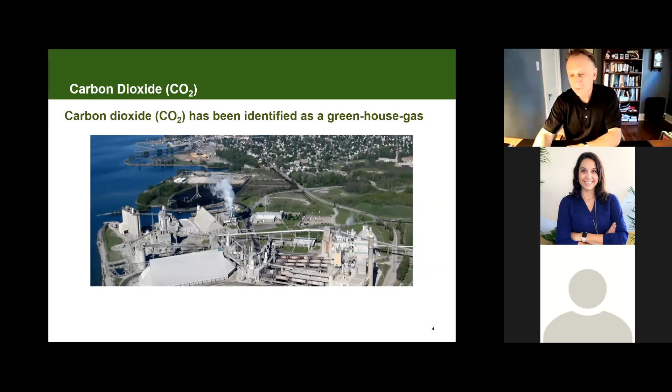Just to kind of bring it home, I know I try to keep this as a very generic presentation, but since this is Michigan, I can tell you that we have a plant in Alpena, for example, which makes about 2 million tons of clinker. And so in Alpena, we certainly don't want to make 2 million tons of CO2. So that kind of gives you an idea of what we're talking about.

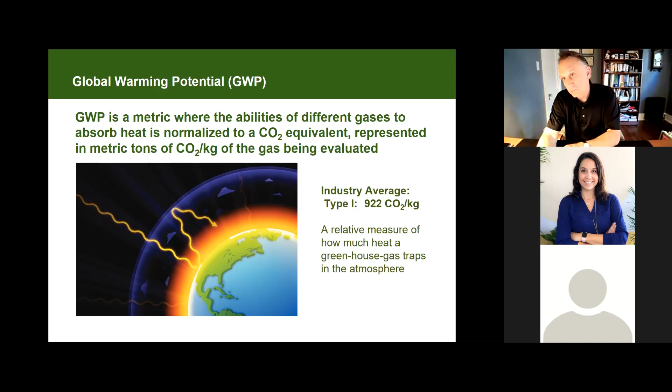So what does that mean? Is that good? Is that bad? It's just a value, is what it really is. It's just the value of the industry average for type 1. But the idea would be, how can we lower that number? So everything that a cement company is going to be interested in is, what can we do to improve our global warming potential? And that's a lot of what we're really aiming at doing, quite frankly.

Okay, so I mentioned a little bit earlier, I tried to set the stage about CO2, and now I've mentioned the idea that we want to lower our GWP. So what's going on at a cement plant? I talked about clinker and everything, but I was kind of quick and vague. So what are we really doing at a cement plant?

Well, during the manufacture of cement, limestone and selected raw materials are crushed, milled and proportioned in a manner that the resulting mixture contains the desired chemical composition that we're looking for in the finished cement. And all this material is then fed into a kiln, and the kiln is fueled by fossil fuels, which are heated to approximately 3,000 degrees Fahrenheit.

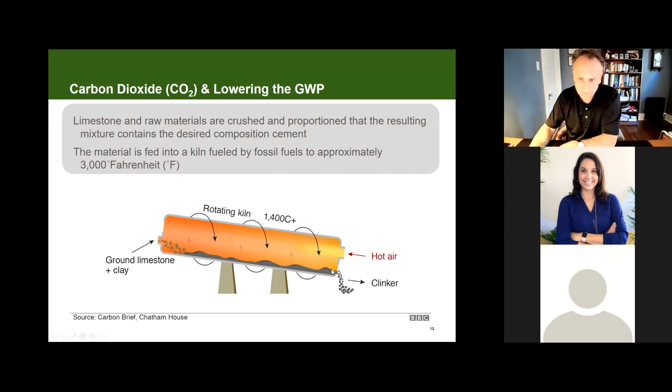So we introduce ground limestone and clay at one end of the kiln. At the other end of the kiln, we have our flame going. And then out of the kiln comes that clinker, which is what we're eventually going to grind into our cement. So then the problem, for lack of a better word, is what comes out of this kiln is our CO2.

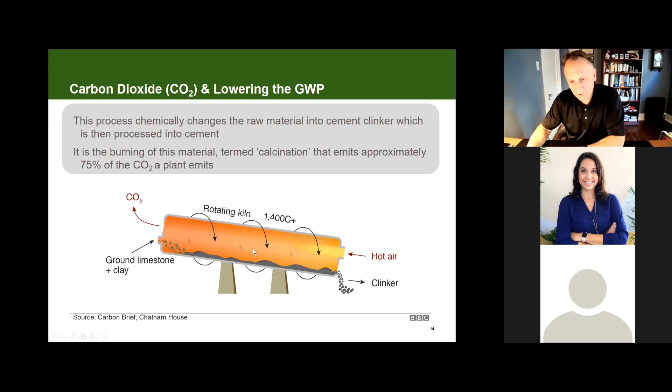So you can see here the burning of this material is termed calcination, and that emits approximately 75% of the CO2 that a plant emits. So this is the crux of what we're talking about: creating this hot air to burn up the limestone to create the clinker that creates our CO2.

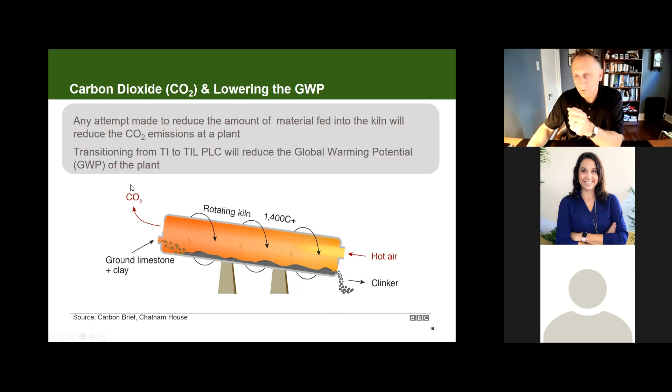So the idea would be, any attempt made to reduce the amount of material fed into the kiln will reduce your CO2 emissions at a plant. So what I'm getting at is, we ultimately want to produce this clinker, this product right here. However, if we can put less material through this kiln, we're going to produce less CO2. So here's our 1 ton of Portland cement clinker.

Let's say we take 5% of the cement clinker out and only made 95% clinker, and then put 5% ground limestone into that 1 ton. So let's say we marketed to the concrete producer a product that is still 1 ton of cement, but it's 95% clinker, 5% ground limestone, and he makes his concrete. What did we just do? Well, we've saved 5% of the CO2 at that plant.

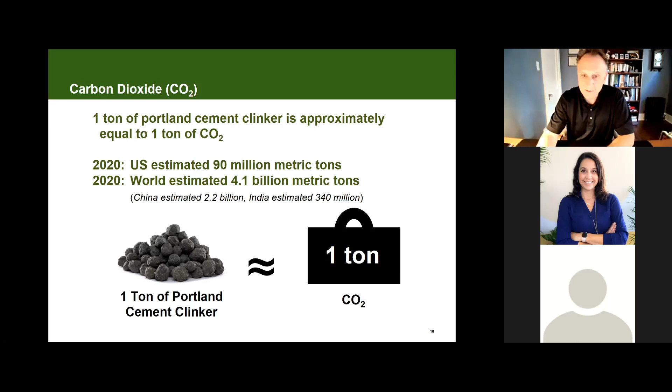So in Alpena, for example, if we were making 2 million tons of clinker, you just reduced your CO2 output by 5%. Now it's a small number, but that's exactly what we've been doing for probably about 10 years, maybe a dozen years now. So what does this mean with respect to cement specifications?

It means that ASTM C150, for 10 plus years or so, has allowed 5% of ground limestone to be introduced into that 1 ton of clinker. So you can see right here, limestone, the amount shall not be more than 5%. So by doing that, we've been able to reduce the CO2 output at our plants by 5%. You make 2 million tons, you've been able to decrease your CO2 output by 5%.

Okay, now the problem is, we have these articles. Literally 2 days ago: CO2 level just passes an important benchmark, a measure of humanity's war on nature. That was a headline, right? So cement companies realize we need to decrease our CO2 output even more. We need to improve our global warming potential even more.

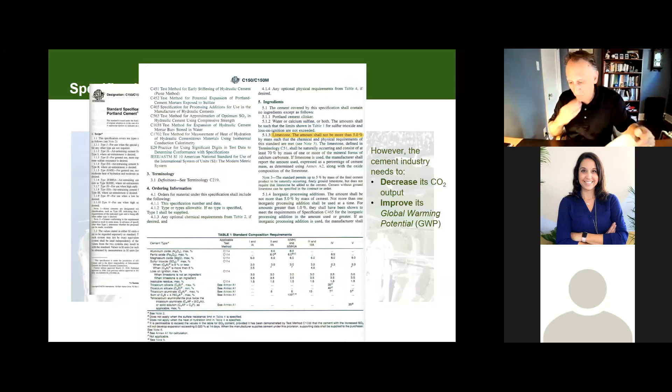So if you take two things from this presentation this morning: the cement industry needs to decrease its CO2 output and improve its global warming potential. That is what we're looking to do, right? So, for lack of a better word, we have to abandon ASTM C150. Anyone who's on this call, when you were in school learning about concrete, you designed with ASTM C150. Your professors taught you with ASTM C150.

If you started working, maybe designing with concrete, C150 is what you referenced. The person who mentored you used C150. Everyone, this was the document we used. Well, since it says 5%, we need to abandon that.

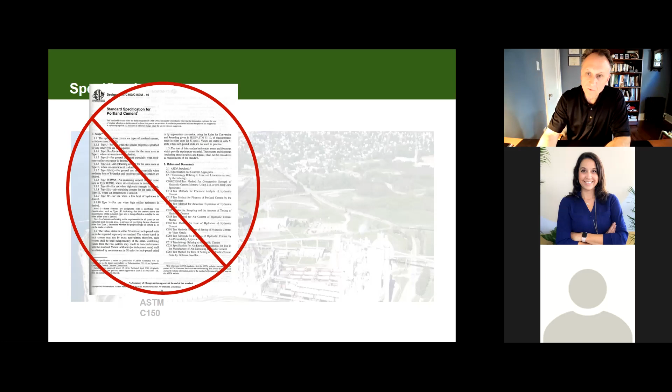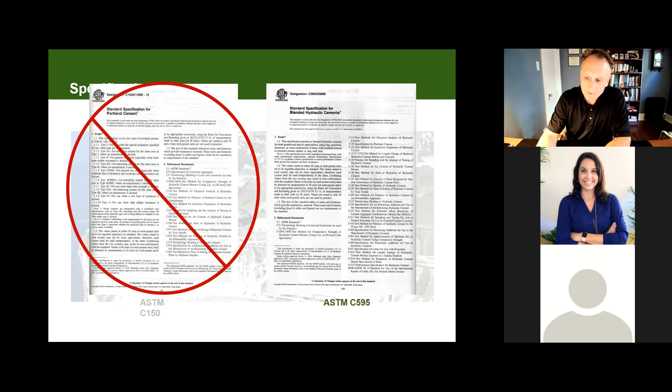And we need to go to what's called ASTM C595. And that's the standard specification for blended hydraulic cements. Now, why on earth would we use C595? Well, because that document, and boy, I'm clicking, it's awfully slow. That document says to make Portland limestone cement, so Portland limestone cement shall be a hydraulic cement in which the limestone content is more than 5%, but less than or equal to 15% by mass of the blended cement.

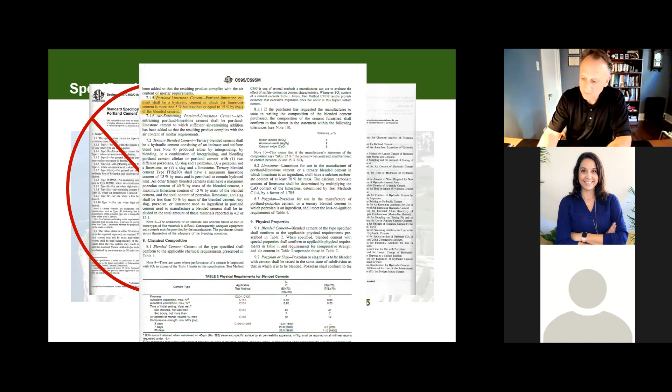So what C595 does, it allows you to go and use more limestone in that 1 ton of cement that you're going to market to the concrete producer. So like I said, for many years, we had 5% limestone. We want to reduce our CO2 output even more. So now we want to increase it past 5%. Well, guess what? We have to use this document, ASTM C595. So I hope that makes it clear why we're transitioning to C595.

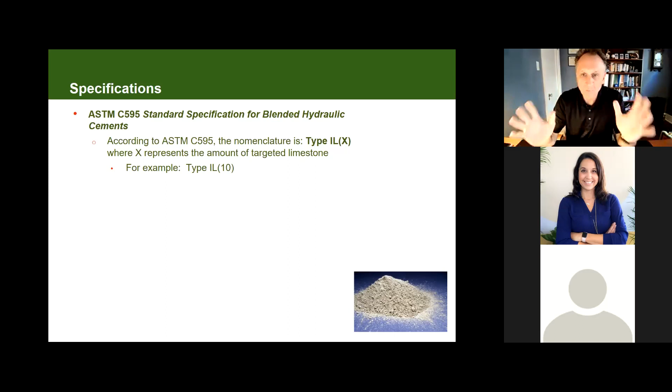So when you look at C595, you're going to see some nomenclature changes, right? So forever we've been using a type 1 Portland cement, if you will. Well, according to ASTM C595, the nomenclature is now going to be type 1L, and then some parentheses, and you're going to have a value in there. Right now, I've got X there, where the X represents the amount of the targeted limestone. For example, a type 1L10. So this would be a type 1 limestone cement that has no more than 10% ground limestone in that 1 ton of Portland cement. Okay, makes sense?

There's another document. It's called ASTM C1157. It's the standard spec for hydraulic cement. Now, in this document, there are no restrictions on the limestone addition. And so there it's just called a type GU for general use. And I'm just making you aware of this because you may see this spec as well. But this one, again, has no limit. It just says you can use in references as a GU.

Now, if you look at C595, you're going to see some other cements in there. For example, you'll see a type 1S30. What is that? Well, that'd be a type 1 that has 30% slag cement blended into that 1 ton of cement. There's a type 1P5. What's that? Well, that would be a type 1 that has up to 5%. It might be like silica fume blended into that 1 ton of cement. And then you can blend several cementitious materials. You can have a 1T S30P5, and that would be 30% slag and maybe 5% silica fume, all blended into that 1 ton of cement.

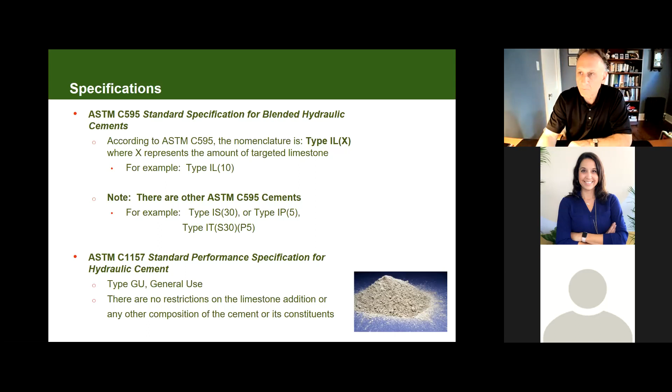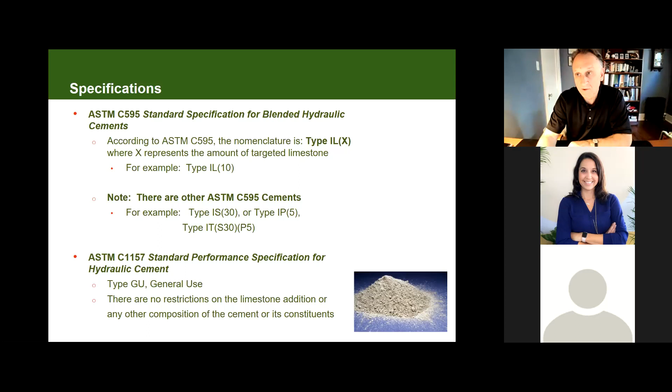So the point is, these look kind of different, right? I mean, we're used to a type 1 and a type 3 or something like that. We need to kind of put our mind around some of this different nomenclature, and I can tell you, we've been building with these cements actually for many years, even here in Michigan, right? So again, why would a cement plant transition to ASTM C595? To lower the plant's global warming potential. We definitely got to have that down pat.

And so transitioning from 5% limestone, which we've done for many years to make type 1, to less than 15% limestone to make a type 1L PLC, a plant will reduce its global warming potential. And I repeat that because, like I said, this is the thought process, if you will, to hopefully get us out of the crosshairs and get us out of these headlines that I read earlier. Okay.

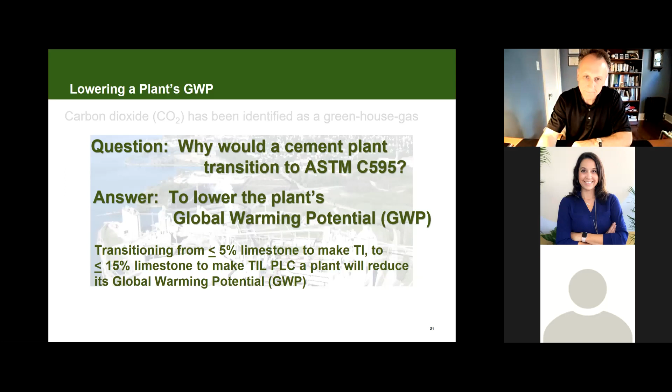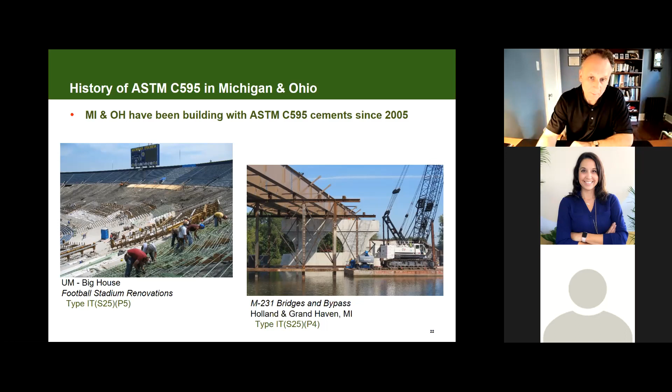So my point is, the industry has been changing, and our specifications, we'll talk about that in a little bit, our designers need to recognize this and get their specifications up to speed, and again, we really need to do this, and hopefully the first few slides kind of set the stage on why we need to be doing this.

Okay, what about codes and standards and guides and things like that? One thing that you'll find is all of your cement specifications and codes recognize ASTM C595. Whether it's the building code, the AIA master spec, whatever document you want to pull up, you're most likely going to find that the cement industry did its homework and were properly cited along next to C150. So C595, as far as codes and so forth, is considered as equal to C150.

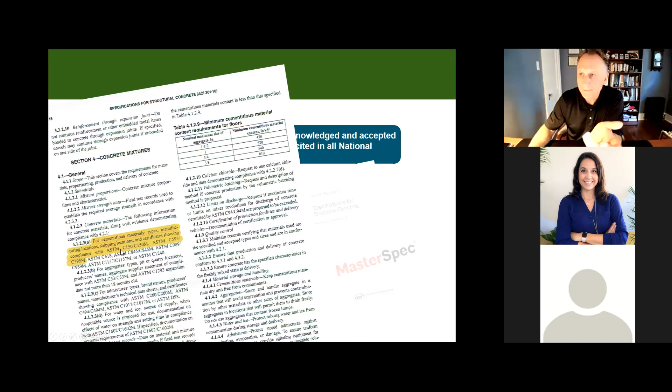By the way, when you see ASTM and you see the letter M here, that just stands for metric. So that means you can buy the document with English units or metric units, and that's kind of the idea there. But the point is, it's as simple as a comma and including C595. So you'll see that in all the documents.

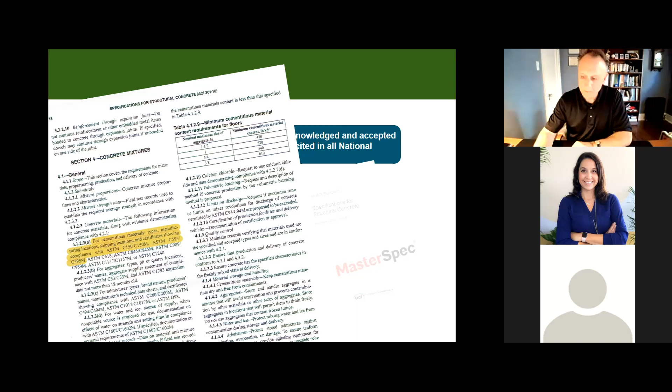So the question then would become, why would these codes and specifications allow a Portland limestone cement? Quite frankly, you may say, it sounds to me like you're putting sawdust in the hot dog, right? I told you a few minutes ago that instead of marketing 1 ton of Portland cement clinker, we're now going to take up to 15% clinker out and put in up to 15% ground limestone. So you may say, how can this possibly work? My strengths are going to be lower. This is going to be just horrible, because you're putting sawdust in the hot dog, if you allow me to use that analogy.

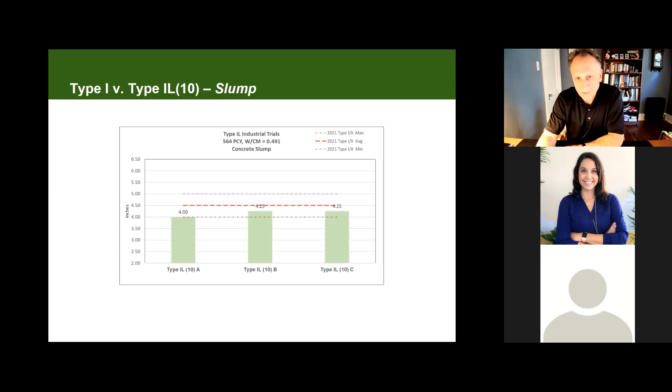So this is some testing from product from, again, July, August, September. So we ran some in, we slumped, for example. We hold all of our water at a constant 0.49 water cement ratio, which is something that we do. And we then evaluate how does it slump compared to what we made in 2021. And you can kind of see there, we were like, well, maybe we were at the low end, and we said, well, you need to make some improvements. Let's see if you can improve on slump, things like that. So that gives you an idea of where we were headed there.

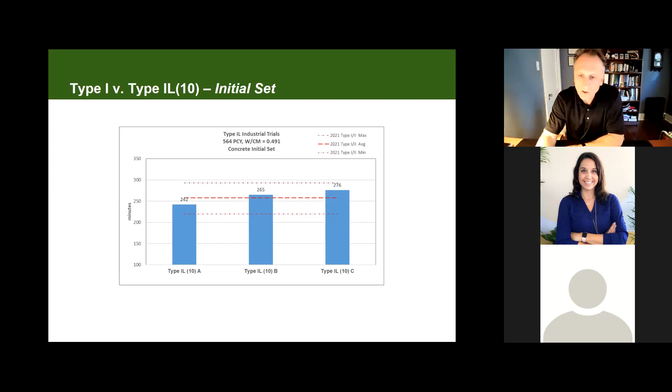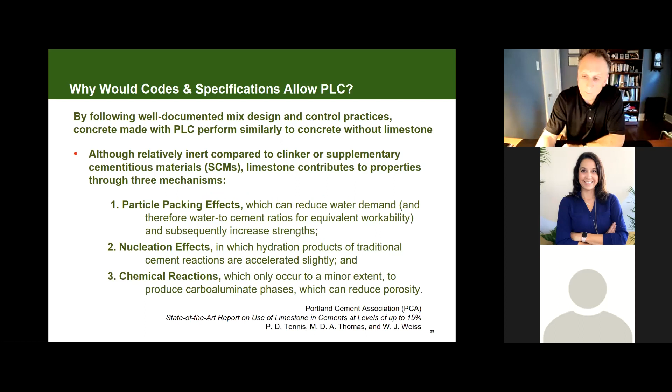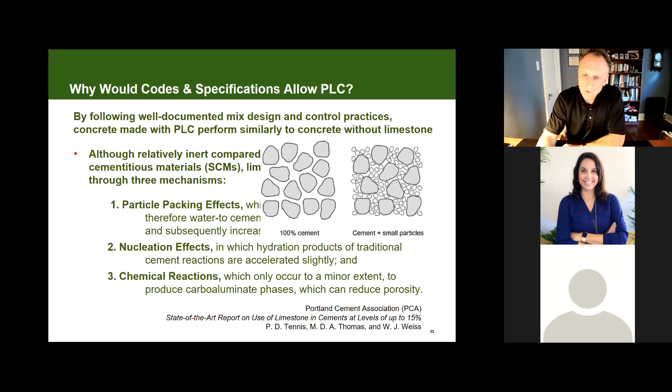So you may again say, well, how can those strengths be there? I mean, we were introducing more limestone fines. Well, again, it goes back to the idea of the particle packing, the nucleation sites. It's these principles you can see acting here, right? It was these principles that are giving us the desirable 1 day strengths. Okay.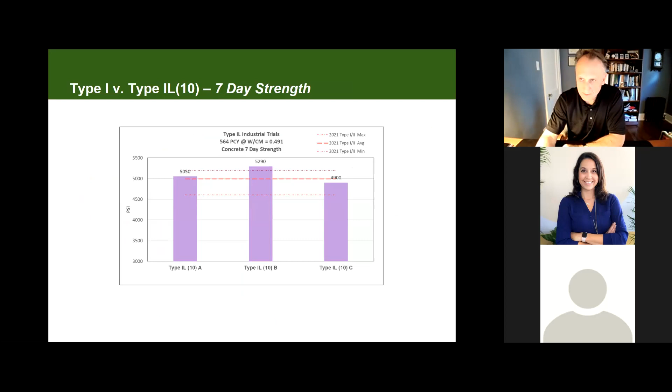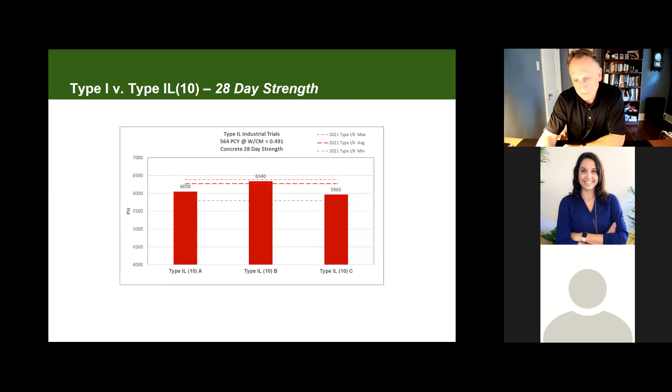7 day, you made it in July, make it again. Okay, you made it in August, make it again. So these are the types of things we were doing at the plant. And then you can see there was our 28 days. And again, I just picked 3 months in a row, just to make a graph that was easy to look at, I suppose.

But so as a cement company, once you do these types of things, and all cement companies do this, or I suspect they do. It makes sense, and it's certainly being on top of your due diligence, right? Well, one thing that was interesting is after we actually introduced this Portland limestone cement to the field.

We have a customer in Ohio, and every 3 years this particular customer takes his mixes and generates 3-point curves, but he generates his curves at a test lab. So he sends to the test lab all of his aggregate, all of his admixtures, all of his cementitious materials, and this test lab performs all of the work for him. So I asked him, well, you did that back in 2019, and he did it again this year, I want to say around February or March, but this time he used the type 1L10. So I said, I'd like to see the data, and then I plotted the data.

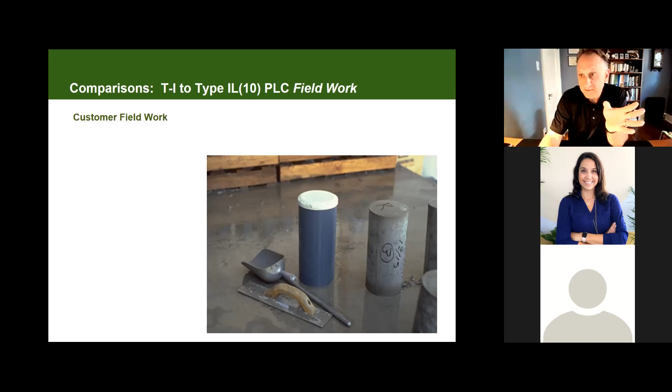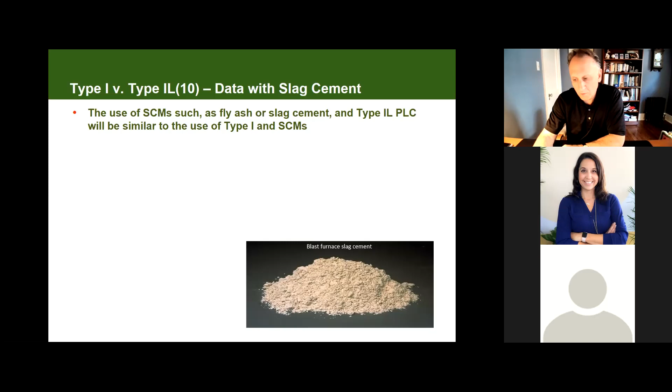All those mixes I just showed you did not contain SCMs. So the use of SCMs such as fly ash or slag, how the type 1L PLC works with those, it's going to be very similar. And this is again our in-house testing. Just to give you an idea, we were pleased there.

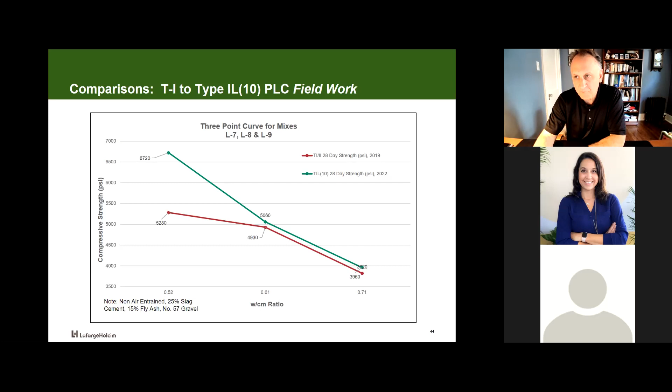Now let's look at the field work. Again, work performed by an independent test lab. And you can see here, again, we're pretty satisfied. It's a like for like, if not better. Again, like for like, if not better, right? And then lastly, here you can see this is a non-air entrained, 25% slag, 15% fly ash. And for all intents and purposes, certainly a like for like type product, okay?

Okay, so that kind of gives you an idea of what we're trying to do here: improve on our CO2 output. We're looking to improve on our cement performance. I think we've tried to establish that. So what can finishers see in finishability? You can make a great cement, but if the person with the trowel doesn't like it, you've got problems there that are probably just as bad as some of the technical aspects of your cement.

We do see about a 10% reduction in bleed. Well, I guess I've got to be careful, I'm talking about my product. We see a 10% reduction in bleed. However, it does appear creamier on the trowel. When we measure bleed in our lab, the type 1L10, we measured 29 milliliters of bleed water, where the old type 1 would bleed 32 milliliters. So approximately a 10% reduction. But what's interesting is, like I said, it certainly appears creamier on the trowel.

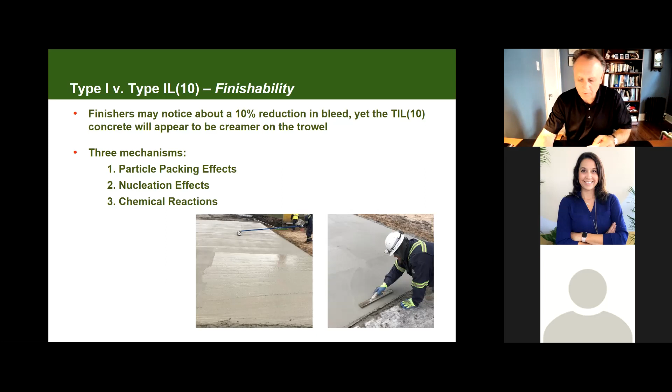And there is a relationship between air and water. And it's not going to be great. Depending on the chemicals you use, it might be 0 to 5%, maybe a 3 to 5% change in some of your chemical dosage, right? So those are things that you'll certainly want to be aware of.

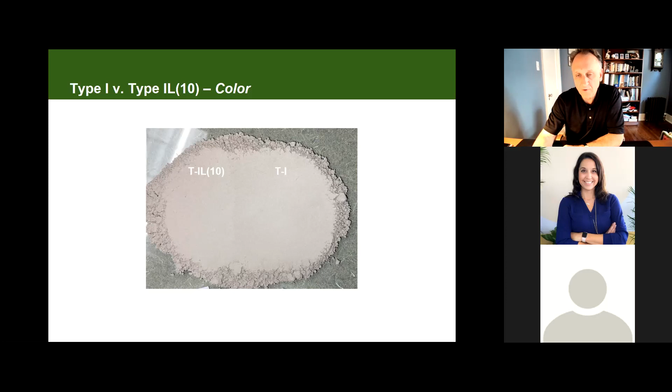Color, for example, it's extremely close. This is probably the most severe way to look at color. We put the cement down on a table, we take a piece of glass and put it over the two cements, and then observe them. And even though this is a picture, I can tell you that it's very, very similar, very close in color. So what about specifications in the design community?

This is kind of a tough one. We've been talking about making this transition for a number of years, actually. And I think one of the concerns was the design community. What are we going to do with the design community? Are all the technical people going to be spending every minute of every day on the phone with designers trying to educate them on what we're doing? And here in Michigan, Alpena transitioned basically January 1. Since then, I've been on 5 conference calls. To me, that's not being overworked at all.

Okay. And here's an example. I got this specification from a customer of ours. He sent it to me in January, and he says, what am I going to do? Because you can see right here, it says Portland Cement, and there's no C595. What do I do? The simple answer, when you talk to the designer, is you put a comma right next to that C150M, and you write C595.

I've shown you in the codes how the codes handled it, and it can be handled as simply in your specifications. Now, of course, there's going to be specifications out there that don't recognize this. I can tell you this particular one. It wasn't even a conference call. I spoke to the designer. We were on the phone. I'll bet you we were on the phone 20 minutes, and I'll bet you 15 of those minutes we kind of talked about things unrelated to the specification.

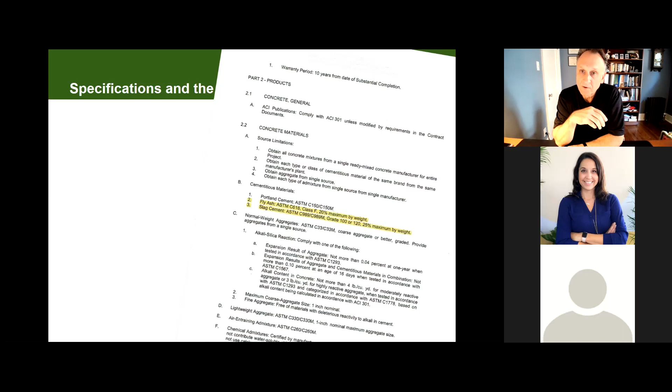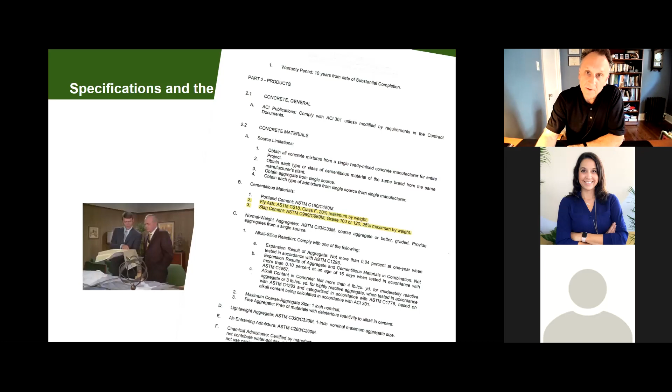It really has. So I guess what I would say is, the design community needs to get its specifications out of the 1970s. And I know we do a lot of cut and paste. I get it. But the reality is we need to get our specs up to speed. And I showed you earlier that we've been building with C595, and I showed you real world examples here in Michigan dating back to 2005. So it's been around, it's been there, and so that's what we need. We really need to recognize this.

The changes are extremely minor. For the sake of time, I won't get too much into this, but for example, the specific gravity, I would say, is going to be lower. So regardless of whoever's cement you're designing with, 3.15 probably isn't the number. I can tell you the Alpena is going to be 3.10. You'd want to check with your individual supplier, but this is a very small change, and it's going to change their mix design very, very little, but it's certainly something you're going to want to be aware of, right?

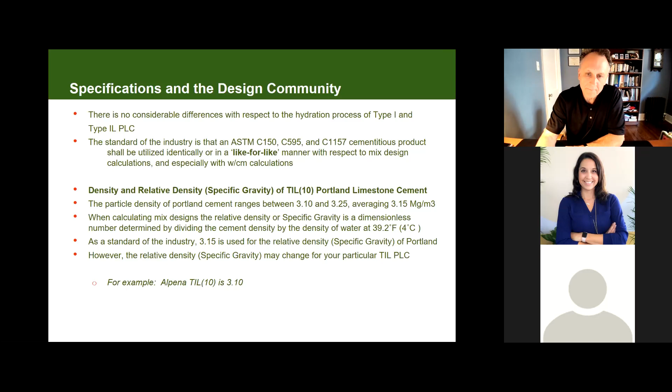If you're interested in a constituent of the cement that you do not see, but you used to see last year on the old report, by all means, ask your supplier, put the question through, and I'm sure every cement company is more than happy to, we all want to be very transparent. We all want to make sure you're aware of what the cement is, and we're all more than happy to provide you that information.

I think Dan's going to touch on MDOT, but it's just part of my presentation, so I can tell you that all of the DOTs in the Great Lakes area here are all on board with this change. I can tell you that MDOT has been outstanding. I don't know if there's any MDOT folks on the call, but I can tell you that the Michigan Concrete Association, Dan and his team, they have an outstanding relationship with MDOT.

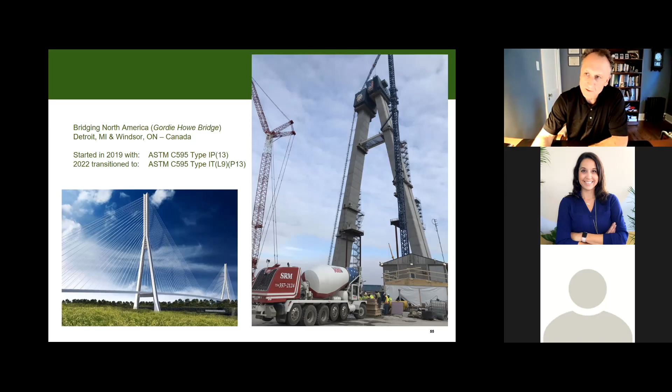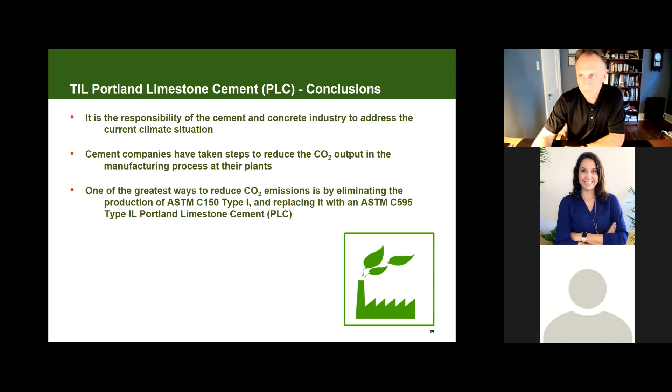Type 1L PLC is an engineered product and as a standard of the industry is specified and considered as equal to type 1. And hopefully from the data I've shown you, you would agree. Type 1L PLC is acknowledged and accepted for use wherever type 1 is specified or cited in all specifications, codes, standards, and guides. To summarize, responsible governments, owners, specifiers, and consumers all demand type 1L PLC.

So I tried to keep it to an hour. I think we started about 5 after, and I got about 5 after. So I hope it all made sense. And so Heather, I don't know if you had questions or you want to do those in the end. Thank you, Claude. We do have a couple questions in the chat, and then Dan's got a few things that he'll summarize with.

The questions are, how does the change to PLC impact the cost of cement production for the plant? Yeah, so, no, I don't think any companies are going to divulge what their costs are. I can tell you costs are extremely high due to inflation. So the cost just to produce cement is just astronomical, really.

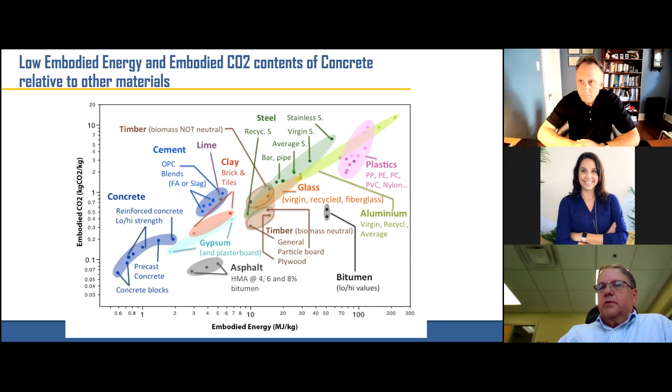I'm going to go through a few things, and we're going to talk about reduced carbon mixes, trying to get back to Arnold to show him that we are already doing what he thought was not being done. But there are things that we have to pay attention to as we make these new concrete mixes, and what we need to do to work in this new environment that we are all now faced with.

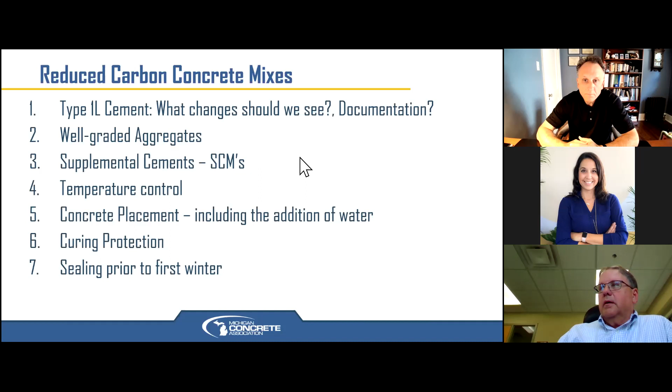Claude talked about what's happening, but it is real. On March 17th, the General Services Administration published a new maximum global warming potential guide. So in a 6-sack mix, you've got to be under 300, and that is kilograms CO2 per cubic meter. You'll see some variation here, but for Type 1 cement, most of the country is averaging about 0.9. Claude said pound for pound, but that all varies depending on the burner fuels going into the plants. Type 1 cement and the clinker has this 0.9 to 1 ton.

Here's the one formula I'll give you today. Kilogram per cubic meter equals 1.68 pounds per cubic yard. That's our conversion from English to metric.

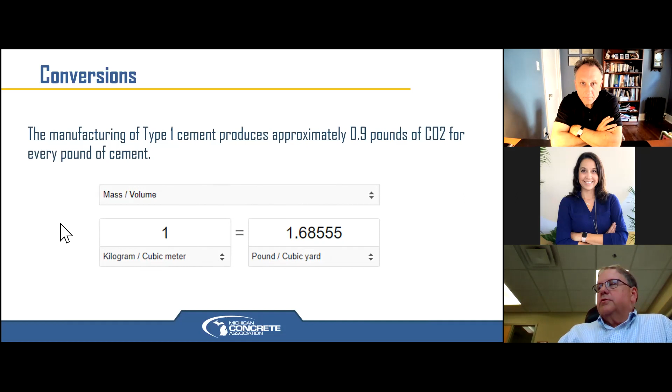Now, what's that really mean? And this is basically answering Arnold. If we took a standard 6-sack mix with type 1 cement, we're going to be right around 301 on the global warming potential. If we just switched to a type 1L cement, we would reduce that amount by 10%. So that's a straight 10% reduction.

In Michigan, since early 2000s, we've been working with well-graded aggregates, taking out some of the cement paste, reducing the total cement content. That alone, if we just stayed with type 1, is reducing our carbon footprint by 11%. With the type 1L, it's dropping it by 20%.

The other thing we've been using very religiously is supplemental cements, fly ashes and slag cements. With a 30% replacement of slag cement, there's a 30% reduction in global warming potential, right? If we use the type 1L in conjunction with that, it's a 37%. So net combined today, we are making concrete in Michigan that's 44% lower in global warming potential than we did 20 years ago. We are already doing what Arnold said that he thought the Europeans were doing.

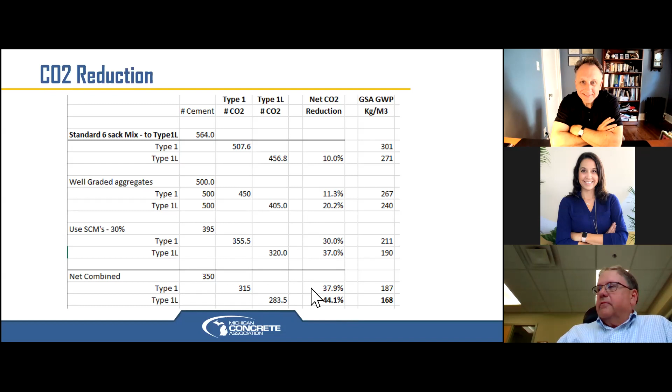He should have just come to Michigan, okay? We have good beer in Michigan. They can come to Michigan to see the same thing they went to Europe for.

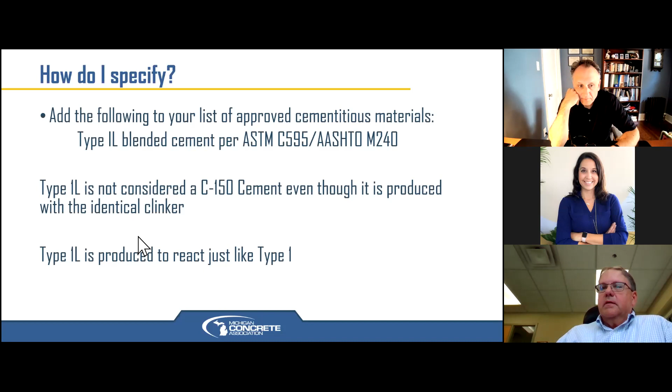But as Claude said, how do you specify it? It's under C595. That's the simple answer. It is not a C150 cement anymore, but the product is manufactured to react and behave like type 1 as far as most of the set requirements that you've seen.

What did we do with MDOT? And Claude is right. We partnered with MDOT. MDOT actually had the type 1L cement allowed in mixes since 2008 or 9, maybe even 2010 was when we put it in the specifications. We just had to wait until the cement producers made it.

With the demand we have and the production we have for cement in this state, we do not have the ability to have two products. It's the silo capacity of the cement producers, the shipment capacity, and also the ready mix producers and the concrete pavers. Their silo capacity of their plants are such that we only have room for one product in this line. So it's an all or nothing type system if we're going to meet any kind of the demand that's out there.

But what happened, basically it was the middle of October last year, the cement companies came and said, we've decided that January 1 is our day. We had to face reality. How are we going to handle the mixes that are out there? Most mixes that MDOT has are good for 2 years. There are projects that are continuing.

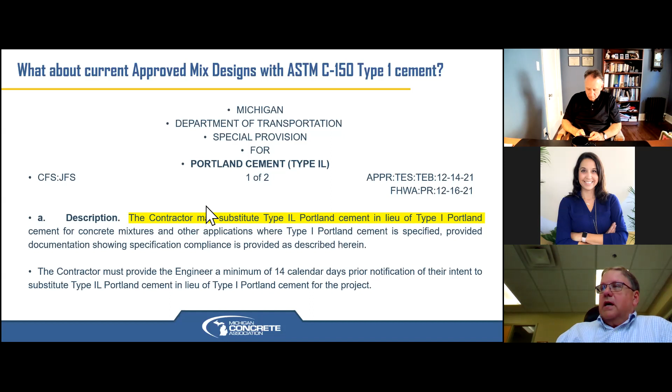So we put this special provision together, worked closely with John Staten at MDOT and Tim Stallard. But anyway, the bottom line is this special provision's out there. It can be incorporated in jobs from either the 2012 spec book or the 2020 spec book. But it basically says contractors may substitute type 1L cement in lieu of type 1.

And it does require that the concrete producer produce a 4-yard minimum trial batch of one mix that they've been using. We wanted the producers to actually have some experience with this product before it goes out on the street. And they needed to test the fresh properties with a 7-day break. They need to have some experience with it before it was shipped to the job.

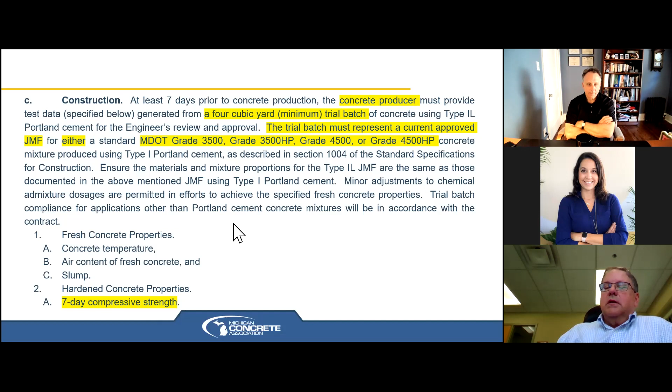But once they did it for one mix, then that plant is good for all of the mixes that they produce. See, for all approved concrete mixtures generated at the concrete production facility for the project. So once they do one trial batch, they're good for making that 1-for-1 switch on all of their materials.

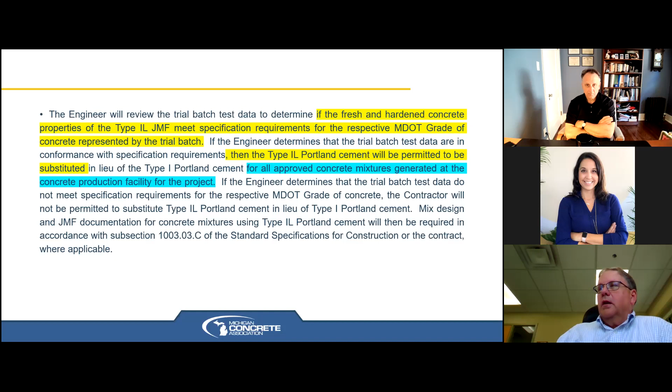Couple caveats. Once a project is switched, you don't go back. And like Claude said, you can't buy it anymore. I do know that the bagged cement business, where you go to the supply houses or Lowe's or Home Depot, all of the cement that's now being supplied is a type 1L cement as well.

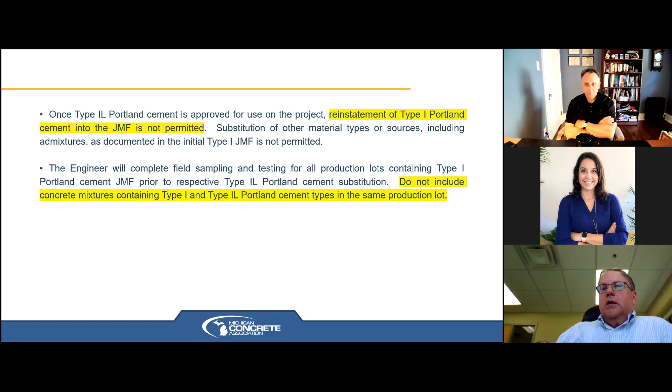And the other requirement that we put in the spec was that the job mix formula and all the sublots have to be, you don't want to mix type 1 with type 1L in a sublot. So on the project sites, the day they switched, they had to close out any existing sublots and start over with a new lot.

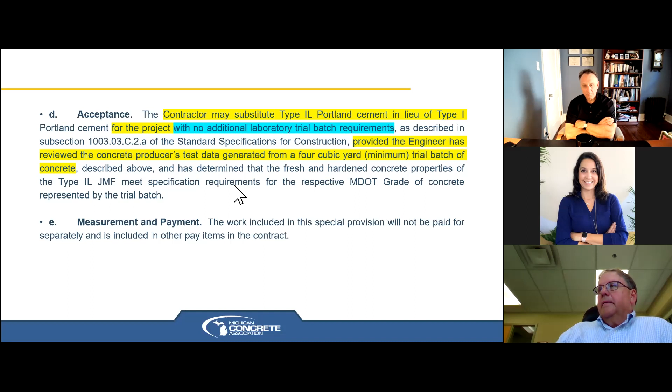There is no additional laboratory trial batch requirement other than doing the 4-yard batch. Now, some of the pavers have elected to do a mix design, and they're just going to run a new mix design with a type 1L cement, which has been allowed for quite a while. And so this is how the specification is now set up to work.

Talk about long-term performance. I don't know if many of you are aware, but Tourney Consulting Group out of Kalamazoo is a very high-tech testing firm, and they get involved in pretty high-level stuff around the country. There was a project in Oregon similar to the Gordie Howe Bridge. They wanted to have a 100-year design service life of concrete. So they came to Tourney Consulting Group and said, run some tests to show us that our type 1L cement will be a 100-year service life concrete.

And they did that. In those cases out there, they're using a Class F fly ash, but their results showed that the type 1L cement was going to perform probably slightly better than the type 1 would have. So they've confirmed with their testing that long-term, we should expect to see very good performance with this type 1L cement.

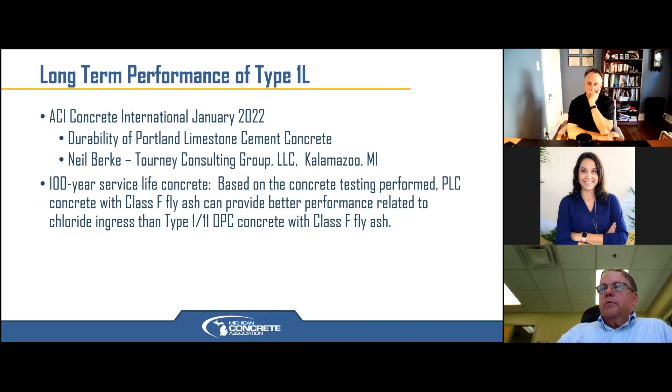Now, as we go into reduced carbon mixes, some of the steps that we will be taking and need to take follow the lead of what we've been doing with MDOT for many years: well-graded aggregates, which is a uniform blend of all sizes of aggregates. It does make it much easier for the material to get moved around because we're not rolling rocks over the top of other big rocks.

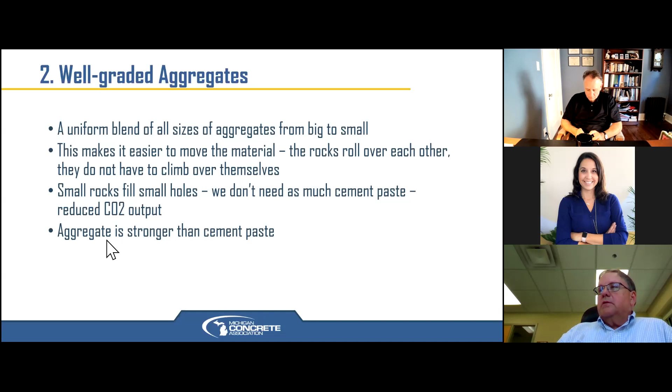There's a bunch of other small rocks that we put in place. It's like driving over a curb with your car. Driving over a 6-inch curb isn't easy, but if you had a 2x4 block set there, it would be much easier for your car to drive over. So small rocks fill up the holes. We don't need as much cement paste. We're reducing our CO2. And by the way, aggregates are much stronger than our cement paste, right? That's a given.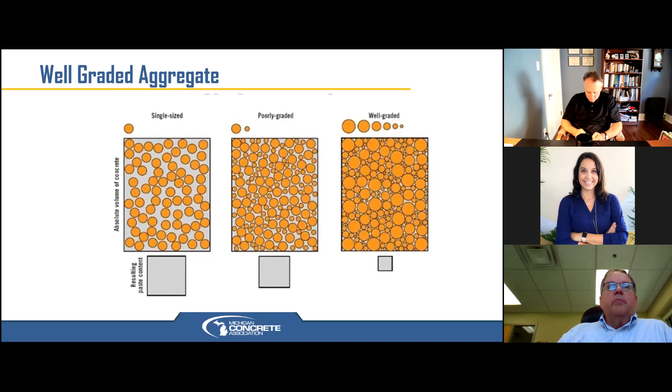With a single-size material, you need a lot of paste to fill in all the gaps. Poorly graded, you still need a fair amount of grout. But when we get to well-graded, we just don't need as much glue. And if we eliminate glue, we eliminate CO2, we make ourselves more environmentally friendly. And we have a mix that works much better.

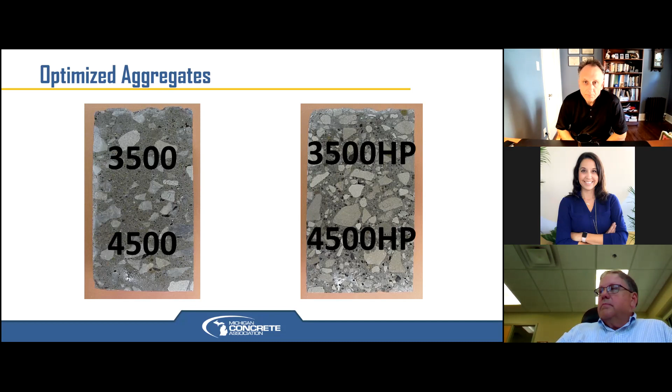So the other big step to take is the utilization of supplemental cements. It's fly ash, which is becoming harder to find, but the slag cement supply in Michigan right now is pretty sound, and we're relying on that. One of the things when you use supplemental cements, you will find that you will gain significant strength between age 28 and 90 days.

With some of the type 1 cements, once you got to 28 days, there wasn't much bump between 28 and 90. But what this tells you is that the reaction with the supplemental cements is ongoing for a much longer period of time. The mix doesn't set up quite as fast. It's easier to work with. But we get some really good long-term durability if we allow it to fully gain this internal strength that really locks it together.

And the 28-day strengths were always getting to what we need for stripping and opening to traffic. In many cases, we're getting open-to-traffic strength in Michigan with our paving mixes in less than 24 hours. But this densification, this waterproofing of our concrete, is something that the supplemental cements do for us, and that happens over a longer period of time.

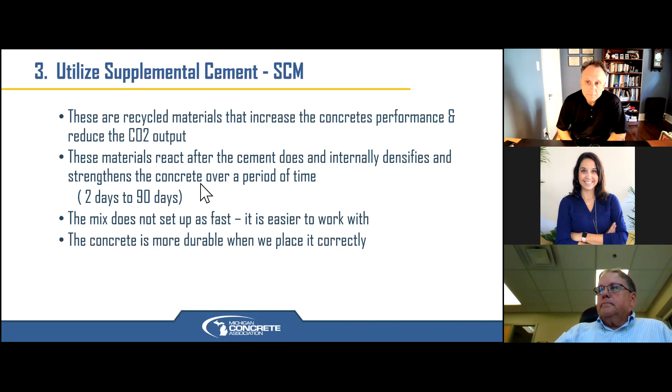So our biggest issue with exterior concrete in Michigan is this salt attack that really intensified the way we've done it in the last few years by using all these brines. When we used to throw rock salt down, it'd hit, land, melt a little snow, and then bounce off. Nowadays, we're putting it on at such concentrated levels. So we have to make our concrete waterproof. We have to make it permanently dense. And that's what the supplemental cements really help us with.

Temperature control. With the supplemental cements, maybe not so much as adding the type 1L, but with the supplemental cements, mix temperature is much more critical. Above 70 degrees, our concrete's going to set up and perform like we normally expect it to. And on hot summer days, we're never usually going to get to 90.

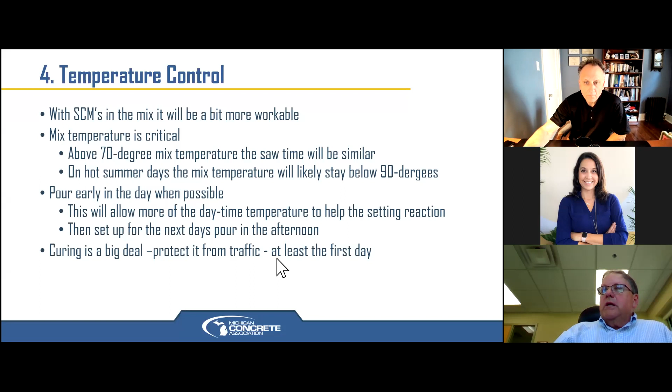But if we pour concrete out in 50-degree weather with 50-degree mix temperatures, it's going to lay there quite a bit longer in the fall or in the spring before it sets up enough. And so it's important that we get our mix temperature right, be very much more cognizant of the mix temperature with these low carbon mixes. And by the way, curing is a huge deal. We have to keep that water in longer so that reaction can continue to take place.

So a couple of things on saw time. In the summer, the ground is warm, the concrete surface is warm, the concrete sets from the surface down. Ideal conditions for sawing joints, right? The top of the concrete's going to get hard fast, and we can saw the joints, and then we're in good shape. But in the fall, the ground is still warm while the air temperature really cools off at night.

With the surface temperature of your concrete being cool, the concrete may actually start setting from the ground up, creating a saw window issue. That's another place where heating the concrete up so it reacts more consistently will help us through some of this. And in the spring, we have the condition where the ground is cold, the concrete materials are cold, set will likely be delayed. Heating the concrete will help get it kick-started. But once you pour it on the ground in the spring, if it's cool air, it just sets much slower, and we're subject to any vibrations or any other things that could impact that concrete.

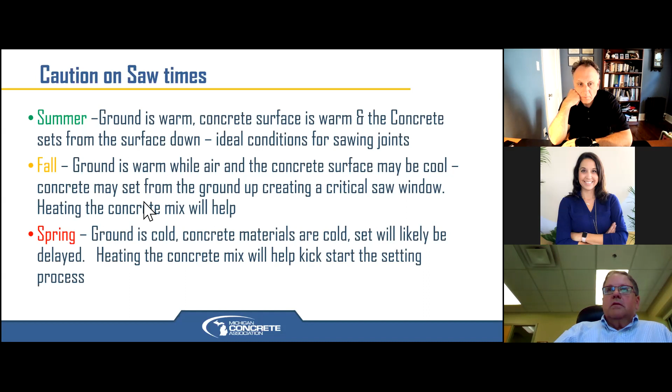Some proper placement practices. When we start using well-graded mixes with supplementals, we don't need extra water, but if you would look at that concrete, it just looks drier. And the first thing everybody wants to do is add water. We don't need to add water, but we do need to vibrate. Once you hit that with a vibrator, it will come very much alive and go right into the place where we want it. We also want to keep pushing hard to keep all the water to be added at the plant, not on the grade. If we're always adding water to a mixer truck, we're not doing ourselves well.

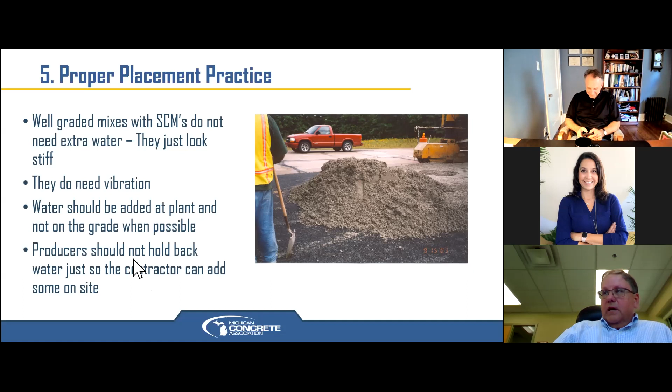There's a habit of producers to hold back water just so the contractor can add some on site. We need to break that cycle. These mixes have the right amount of water they need. They behave nicely as long as we're living within those proper zones.

Curing. We want to talk about curing a little bit. We need to apply this curing compound immediately. This seals the water in. You almost can't seal it too soon. Claude noted that the bleed water is being reduced. So we need to keep that water there so we can fully hydrate our mixes. We've got to have complete coverage.

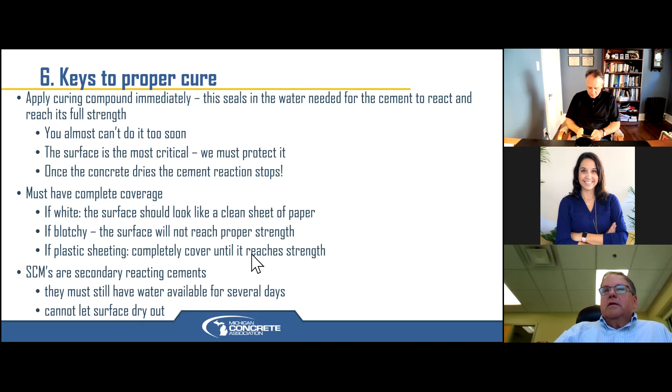If it's white, the surface should look like a clean sheet of paper. If it's blotchy, we tell people, if they were painting your house and it came out looking blotchy, what would you tell the painter to do? And that is to go back and repaint it. It does need to be complete coverage. Like I said, supplemental cements are secondary reacting cements. They must still have water available for several days. We cannot let that surface dry out in that first few hours.

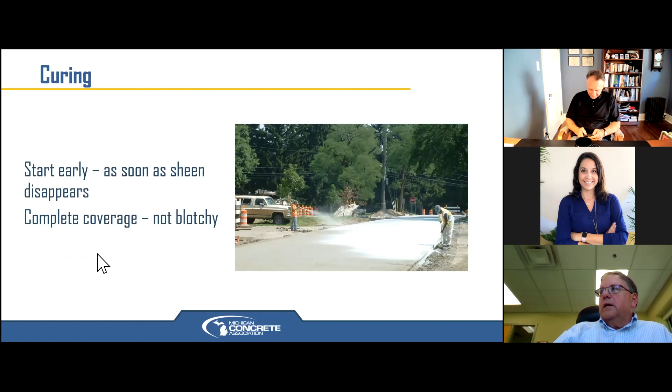There's a good picture of a guy, even reaching all the way across, you can see that slab has a nice coating. It's a very complete coverage, not blotchy. That's what we're looking for. We also talk about sealers, and that's something that we need to consider a little more than we have in the past.

You can buy a paint, which is, you know, waxes, acrylics, chip seals. We can paint a surface, that'll seal it. Pore blockers: these pore blockers are chemicals that we put on that react with the calcium hydroxide that's in our concrete and form a gel that blocks moisture. But this basically caps it; it keeps the moisture in, and it won't let moisture leave or won't let

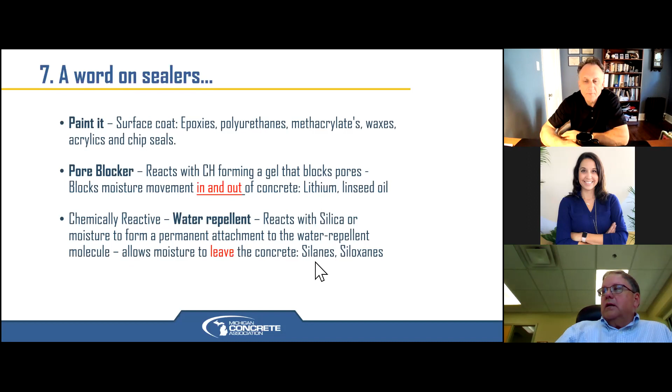When do you apply a sealer? They don't really consider them curing membranes, but they should be applied to hardened concrete after about 28 days. They keep the water and the salt out. The supplemental cements provide great long-term density as long as the reaction is allowed to be completed. But we build a lot of projects in the fall, and at the end of that fall, the true density hasn't been reached yet. It's strong enough to handle the traffic loading, but it's not impermeable. It hasn't sealed itself up enough yet.

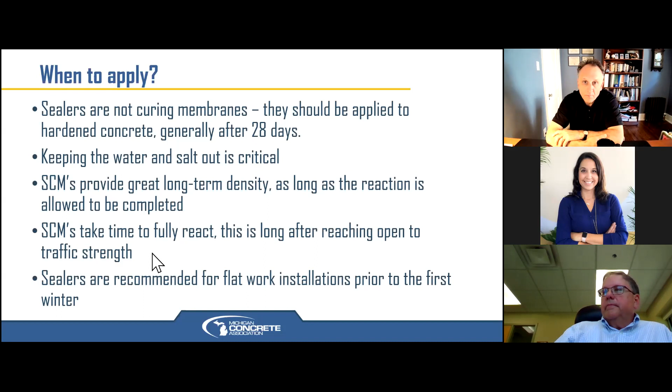So we really are pushing people to think about adding some sealers in the fall on all the new flatwork prior to that first winter. We put a silane sealer down. It doesn't cost much, but it will give you that protection for these driveways that we see starting to deteriorate after that first winter. But especially your exterior flatwork and any commercial work outside buildings where we know we throw a lot of salt down, it's pretty cheap insurance to keep that concrete waterproof.

So silanes are extremely small. It penetrates the surface, so you spray a silane down and it'll look like it didn't do anything. But it soaks right into that concrete and reacts internally. It doesn't change your skid or slip resistance, and it really works better for a direct application on concrete. Siloxanes are slightly larger. They do form a hydrophobic resin, but they're really great for concrete block, non-cementitious material like brick, stucco, kind of like exterior or vertical walls.

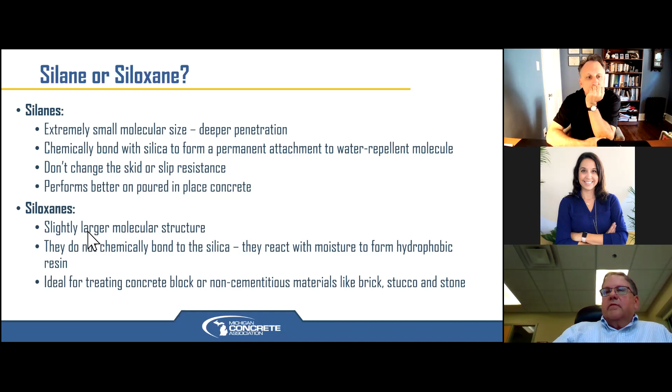But silanes are really something we need to think about, at least before that first winter. By the time the second winter rolls around, our SCMs have reacted, and we have a nice, very dense mix that will perform well.